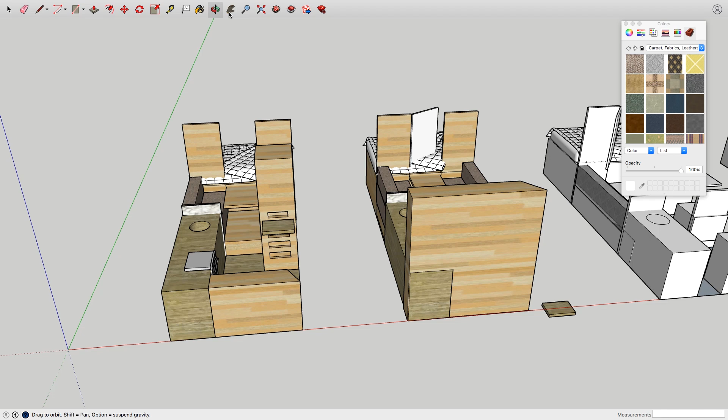First up, I'll just run you through a couple of the designs I've gone through. I've made about 50 different variations of this van. These are just a couple you can see here. So this was the first sort of design I was thinking. So originally I was going to have 3 beds because it is a 3-seater. But I figured the amount of times I'm actually going to have a third person is going to be pretty rare, so it seems silly designing the whole van around that.

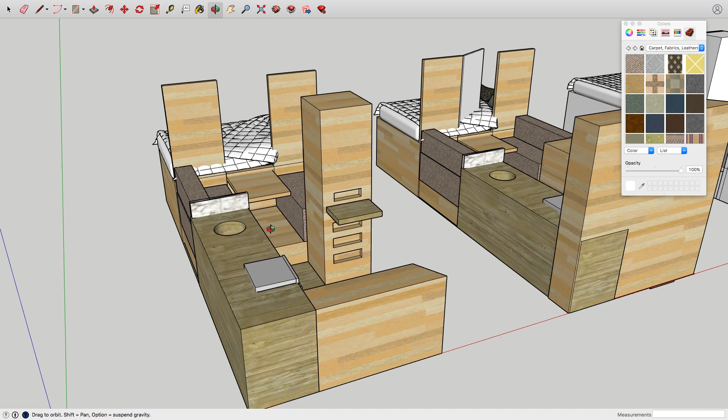This is always the front of the van, by the way, this close end. Sliding door, enter through here. Big kitchen running along this wall here. And then I was going to have a raised seating area here, and this was raised so I could slide my surfboards in from the back of the van underneath here. Then like a slide out table, so this would be the eating and editing area, and then this seating area would flip down into the bed. And then the main bed would be at the back.

But I moved away from that, mainly because I thought it'd be really annoying if you set up your dinner here or whatever, and you need to get up into bed. You're gonna have to fold away this table every single time you wanna get into the bedroom. So you're gonna have to pack away all your dinner, put away your laptop if you're editing, clean everything up, slide the drawer away, put that up in here.

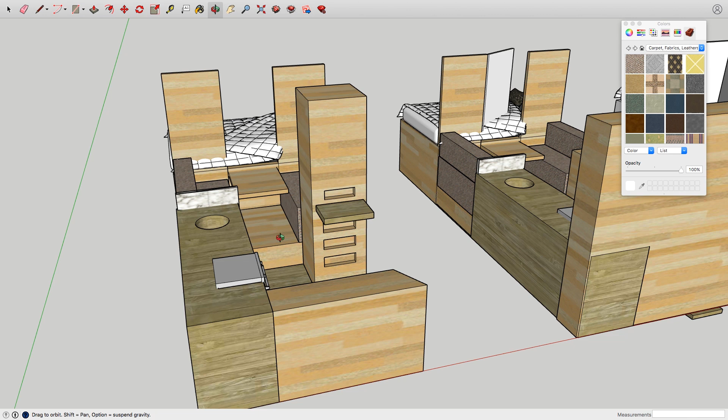If one person wants to get up early and have breakfast or do some editing, then the other person sort of has to clamber through the seating area. And I just don't like the idea of having the seating area in the walkway.

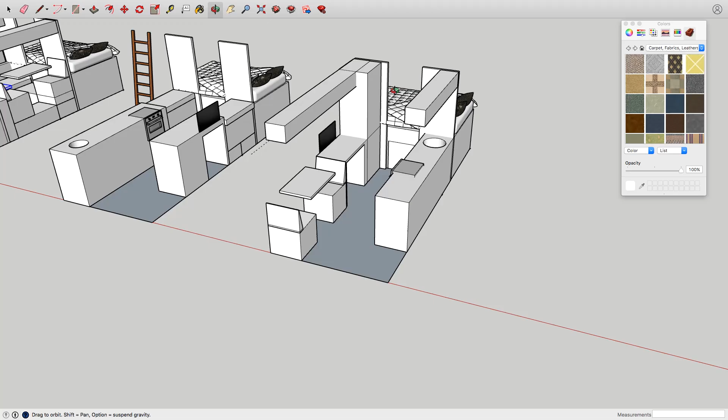So with this one, my current one, can't really change it now too much because I've already cut all the windows. Gonna enter through here, through the sliding door, full-time sitting area here with a big pop-out window above that. And I love the full-time sitting area because you have somewhere to sit all the time. You don't have to fold anything up or slide anything out. Doesn't matter what the other person's doing. You have this completely separate area here, and also you're going to be able to sit here and look outside through the sliding door and out through this big window as well. So it should be pretty nice.

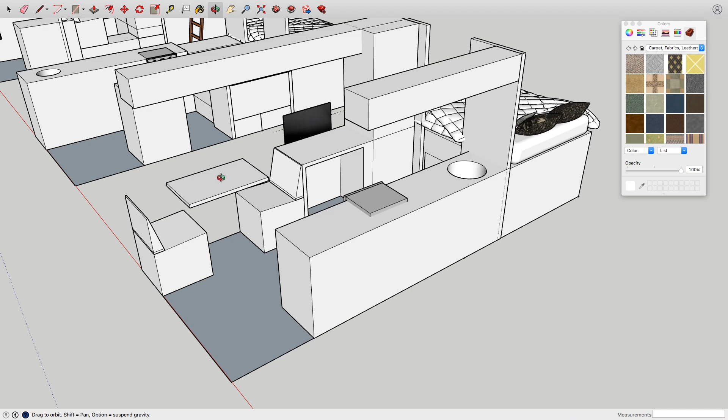And then moving down this way, I'm going to have a full-time desk, work area set up with a monitor mounted in the wall. And the idea with that is, right now I've got my laptop and everything on this table, and I can't actually use the table. So I have this permanent sort of office desk area over here. Have a slide out chair with some storage under it. I think that'd be really nice having just a really solid work area.

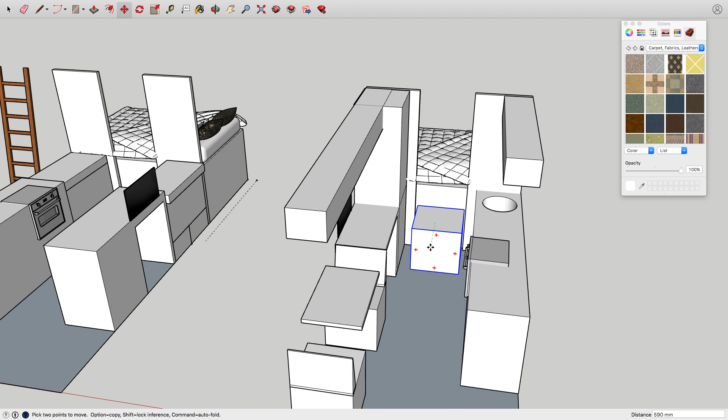Then I'll have a full length wardrobe here with all my clothes and everything. I'm gonna have a slide out toilet down here. Don't plan on using it very often, but you never know. And then massive kitchen all the way along this wall here. This will extend out past the sliding door, so you have this nice bench space facing out through the sliding door. That should be nice. And then heaps of overhead storage on both sides.

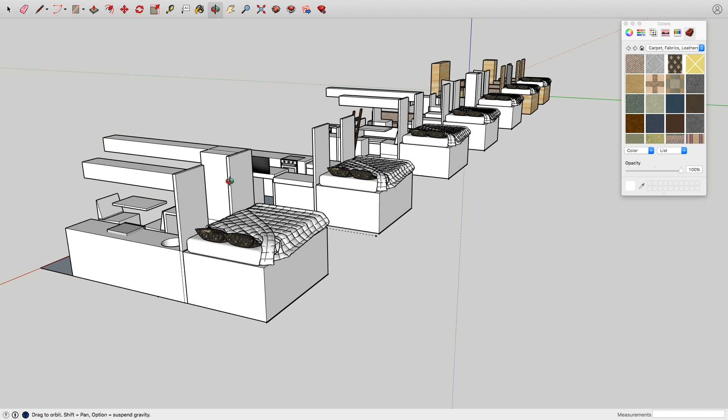And then the bed will be up the back here in its own little section, which I love. It's so nice having it like that. And yeah, I can just fit widthwise. That'll be about 1870 long, so long enough to stretch out fully.

So now I'm just going to give you a super quick rundown on how to use SketchUp. This is just a really basic way to use it to rough out the initial design of your van. This isn't a detailed build design. It's just a layout design to get your ideas down and see if the size is going to work and everything like that.

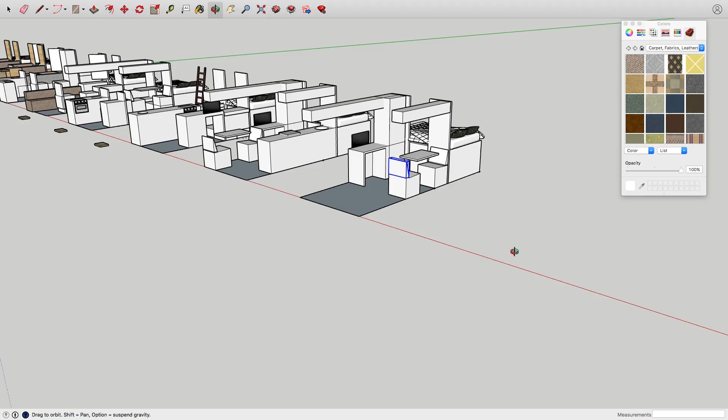So I'm using SketchUp Pro 2019. The trial lasts 30 days, so it shouldn't take you more than 30 days to design the van, so that kind of works well. So first up, go to File, New from Template, and then I'm going to use the architectural millimeters one. I'm going to delete this little dude. Sorry man, don't need you. So this is your toolbar up the top here. I'm going to grab the rectangle tool.

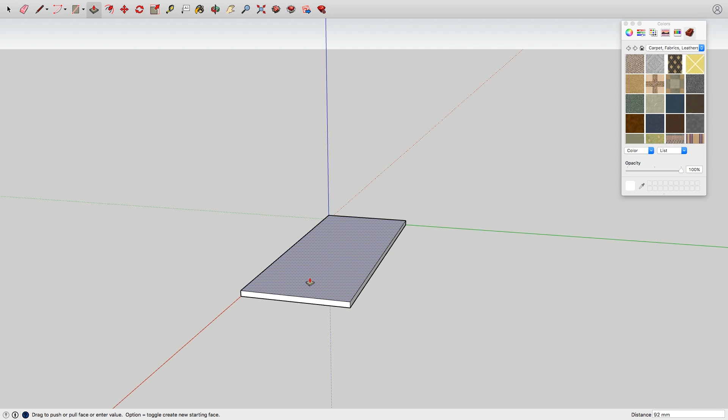I'm going to start in the middle, and I'm going to create my floor. So my measurement was 4,500, so you can just type that in, comma, I think it was 1750 the width, enter. So that is my floor, and what you have to do for every single shape you make is to make it into a component. So first up, I'm going to extrude this with the push-pull one, bring it up about 20 mils, so you can just type in 20, enter. Grab your select tool, and you're going to triple click this, right click, make component. So we'll name this floor.

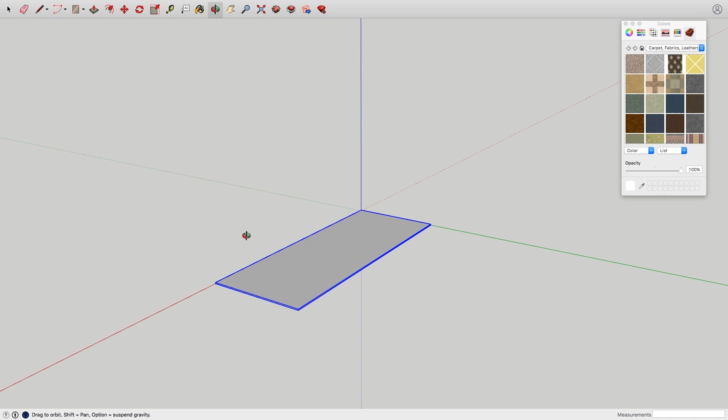So now you've got your floor made, and that just gives you an idea of how much room you've got to play with. That's all to scale. So everything you build will be on top of this. Think, where do I want my bed? Do I want a full-time bed? Do I want a fold-up bed? Whatever. So I'm going to grab the rectangle tool and drag it across. I want my bed to be about 1400 wide. Drag it up to 1400.

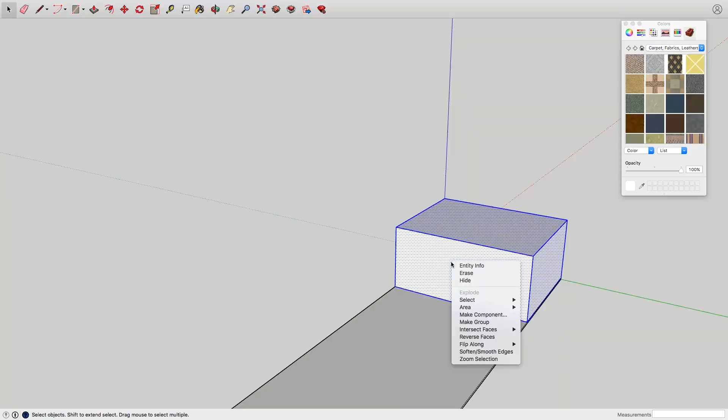Click that, and then grab your push-pull tool. I'm just going to extrude that up about 800 mil, because that's how high I want my bed. Type in 800, enter. Now remember, you have to make every single shape into a component. So triple click, right click. We'll call this one bed. You can just keep adding as many details as you want.

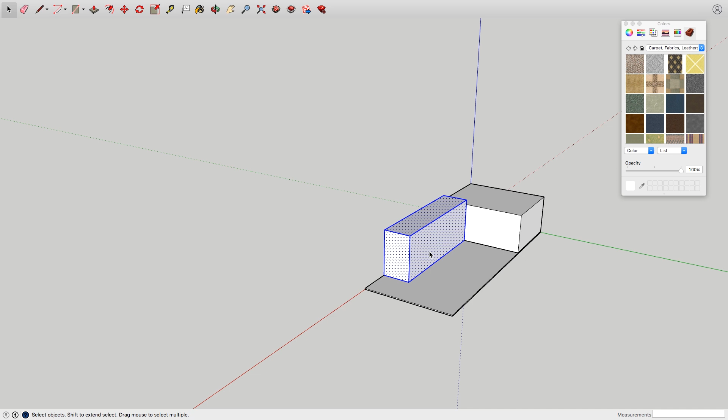Just gonna add maybe a kitchen along here. So think about how wide you want your things. I'm gonna make my kitchen about 600 wide, so that will accommodate my fridge and be a good workspace, but it's not gonna be too wide. And I'm just gonna extrude that up. 900 is a pretty good height for my bench tops, I find. So now I've got my kitchen in. Triple click, right click, make component. Call this one kitchen.

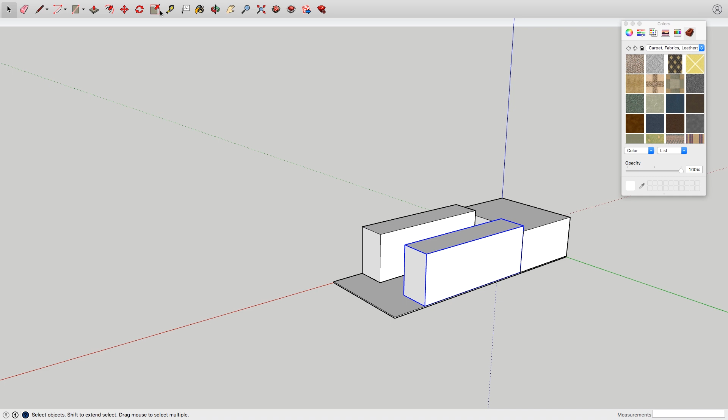So now you've got the move tool. You can click this shape and hold option, and I'm just gonna make a duplicate of this on that side. Then I might want to make that a little bit shorter, just kind of blocking the door. So you can grab your scale tool, which is this one. You do have to have the shape selected. Grab your scale tool, and you can adjust pretty much every scale you can think of. I'm just going to worry about the length one, which is this one in the middle here. So click on that, just drag that a bit shorter. So now I've got sort of like a galley kitchen with a walkway up into the bed.

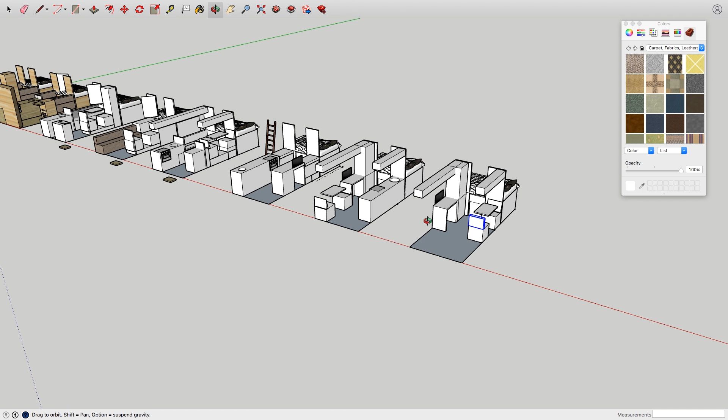So one of the things I really like to do is just to keep making duplicates of your design. So just copy it and drag it over. And then you can go into your design and just play around with it as much as you want. As I said, you can go into as much detail as you want. You can make it an exact replica of your van if you want. You can change materials, you can add components, you can add pre-made things from the 3D warehouse. You can do so much with it. That was just a very basic rundown.

I just want to go through a couple of things I really like about the Sprinter. It's a massive mess right now because I'm trying to live in it while I do the van up. But yeah, massive kitchen area, huge workspace, overhead storage up here, proper full-size sink with a normal mixer tap. This window pops open.

The other main thing is this full-time seating area, which I'm currently using as an editing spot, which isn't really working because I have nowhere to eat or anything. So that's why I want to put a full-time desk in the other van. But usually this is really good because you can sit down and have a meal whenever you want. You don't have to fold up a table or flip anything out. You can just sit down and chill out there. It's really good. And then the bed is completely separate up the back here.